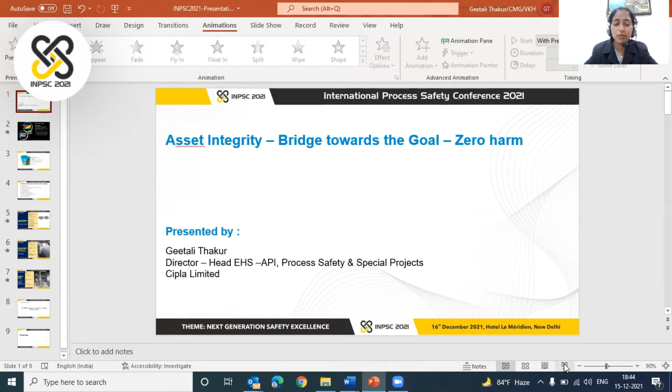Right. So we are going to look at how asset integrity is a bridge towards goal zero. We all have a goal to have zero harm. In the industry, for all the EHS professionals, that's really at the top of the list. And asset integrity really helps to bring what is written in the documents and on paper to achieve this zero harm goal. So before we go ahead, two disclaimers, I should say.

One is that I'm not somebody who designs asset integrity and would actually be implementing it in terms of the mechanical design part of it. I'm more of a process safety professional who is very passionate about what we really give to the shop floor. So that's the first disclaimer.

The second disclaimer, and please excuse me if at all I end up in that mode, is I'm sometimes a teacher rather than a speaker, so hopefully I wouldn't be in that mode today in the next few minutes.

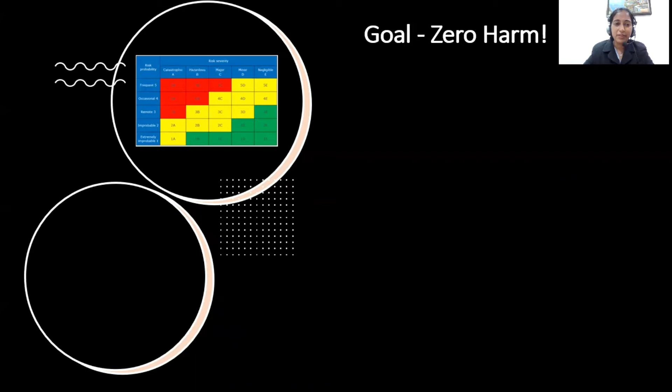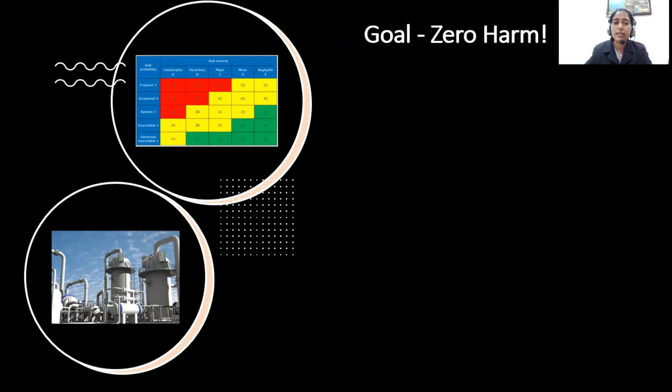Right. So as we go ahead with this goal of zero harm, what we really look at as process safety professionals is we would put things from a hazard document into a risk matrix, and then we would say this is an unacceptable risk, and this is where we can bring in certain controls. But what can really take us to where zero harm can be achieved is working a lot on asset integrity, on what is really required to be safe by design.

What I mean by that is a lot of times when we do these risk assessments, we assume certain things, right? For example, we assume that the nuts and bolts of a particular pipeline will be placed in the right position. Asset integrity, just looking at the definition, is to ensure that the important equipment will be suitable for its intended application throughout its life cycle, whether the plant has been operated for 20 years, 30 years, or however many decades, and to ensure that we prevent catastrophic failures during operations.

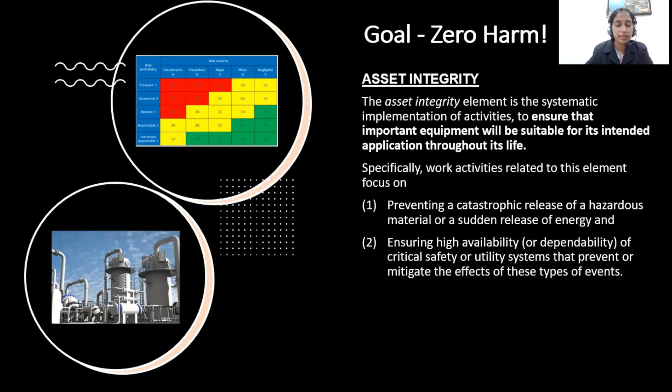So that's really going to be our focus today when we talk about different case studies. I'm not just going to take you through a talk, but through a few case studies.

So again, coming back to this, how do we look at this? If you look at the design, in fact, our good process engineers, the process chemist, and then R&D would give us a certain kind of design integrity, right? And we try to really make a particular process safe by design. And then the operational integrity, that's nothing but process safety management, looks at what are the possible accidents.

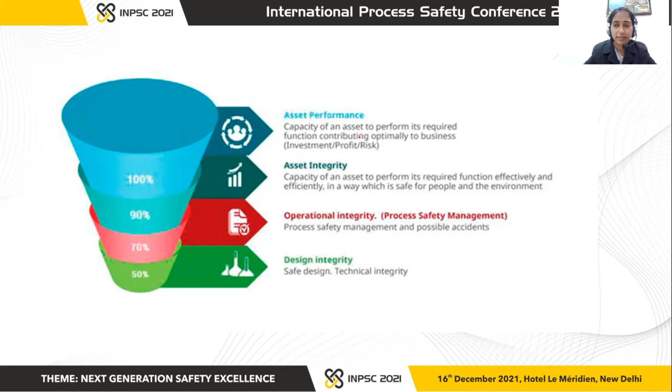So if you see here, we have come up with some kind of a document. And now what's really important is to see how these things which are written in the document can really be brought into reality, to ensure that the asset performs well. And beyond that, to ensure that the asset that has been installed takes care of safer operations, that's minimum risk, and also ensures that overall equipment efficiency is as required or at its highest.

We would really get into each element of asset integrity. I'm not going to bore you by giving you a lecture on all this. But we'll pick up some elements out of this and look at certain case studies on how these particular elements can actually have an impact on safe operations. We'll take some examples out of this.

So the elements are right from risk assessment onwards. The first part, the first 1, 2, 3, 4, is really about how we get certain things installed right, and then how we maintain them right, and then how we really have that PDCA cycle of auditing and surveillance to ensure that things are the way they are designed to be and the way they are desired to be.

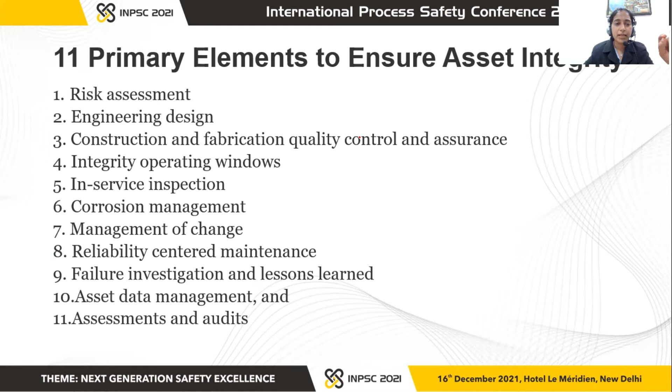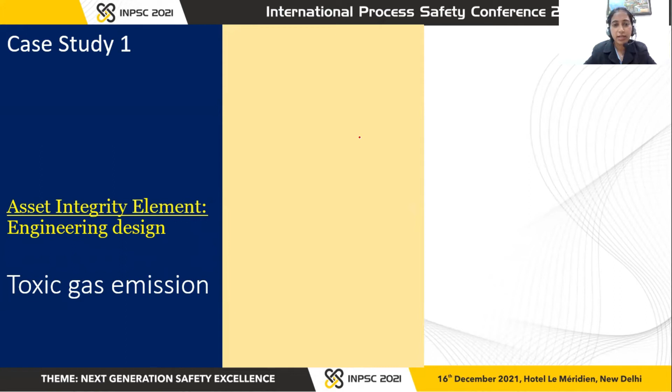Okay. So let's move to our first case study. I don't know if it's a good one to start with, but we are talking about toxic gas emissions, right? And the element that we have picked up is engineering design. We'll look at how asset integrity helps in this particular case. And let me put up another disclaimer here: these are not incidents from any of the organizations that I've worked with, but surely something which is part and parcel of the chemical industry.

So the first case is of a particular reaction which has the potential to form HCN gas as a byproduct. We all know that hydrogen cyanide is lethal. What is less known is that it also has a flash point as low as minus 17.8 degrees centigrade. So it's lethal as well as flammable. What is really required in this case by engineering design is we could have nitrogen pressure padding here. We could ensure that the right scrubber design is put into place.

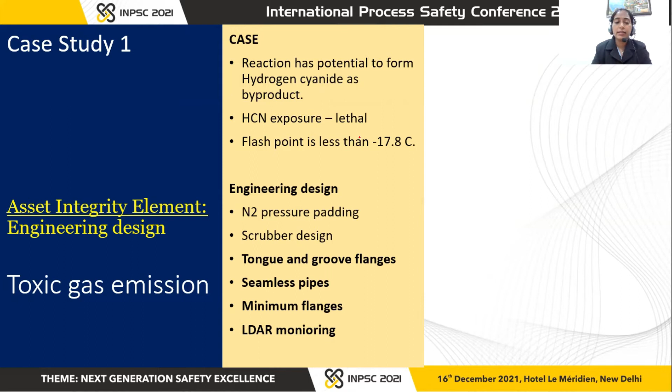The first two would get covered in process safety risk assessment studies, the operational integrity part that we mentioned. But something that is really part of asset integrity is things like tongue and groove flanges. The engineer is going to be the one who would say that for this kind of duty we would have specific types of flanges and pipes. What else could we be doing? Could we have minimum flanges, because those are the places from where emissions could come out, and also have leak detection and repair monitoring in place.

So this is how, in fact, the asset integrity program could be really helping us in this particular case. The next one is a more interesting one. Let me promise you that we do have two more cases which are interesting.

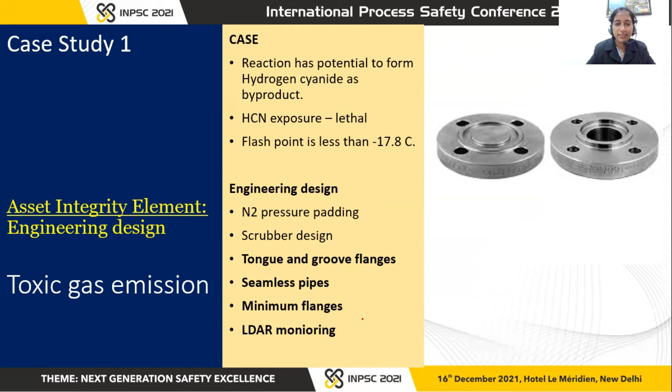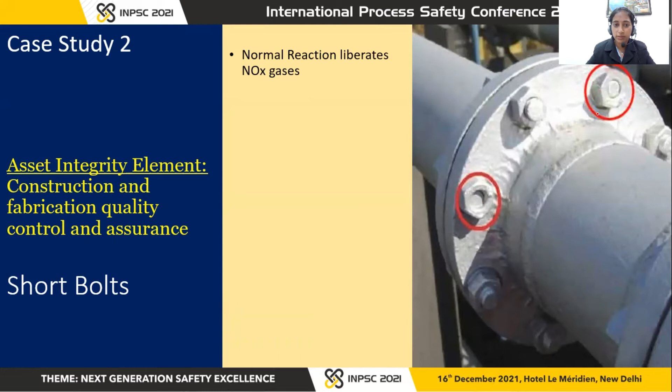So in this particular case, the normal reaction liberates NOx gases. We do have such kinds of reactions in the chemical industry. The safety relief valve is designed for 2 kg per centimeter square. But the vapor column, which takes these NOx gases to a particular scrubber, is having short bolts. So you can imagine what can happen, right?

And in this case, let's say that there is a scenario of vent blockage. So in that case, what's going to happen? What could happen is that it would start pressurizing, and this could end up as a weak joint, leading to spraying of liquid from these flange joints, causing injury, disability, whatever we say.

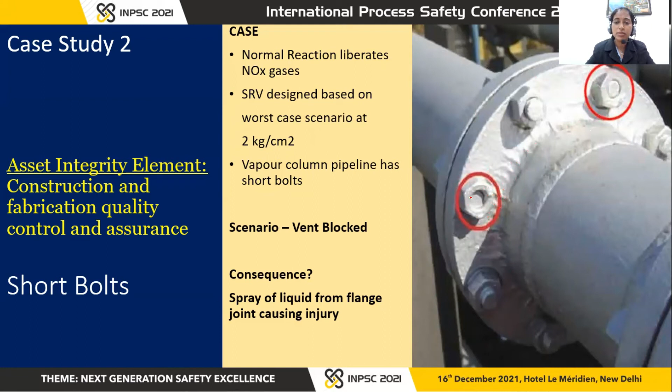So just this particular small job, these sometimes are in the hands of the contract employees who are carrying out this particular job. Imagine the consequence of this, and just a small thing of how asset integrity really plays a role. The third one is on corrosion register maintenance.

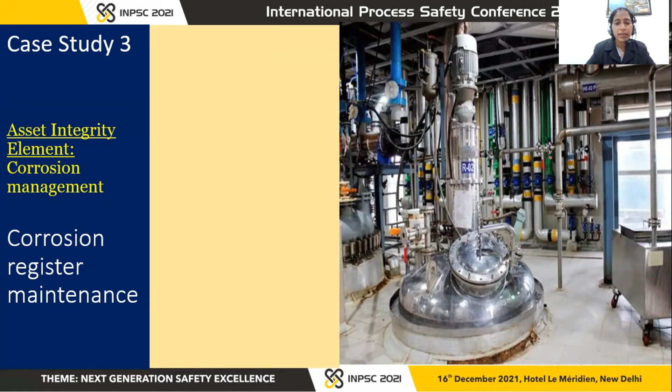So corrosion maintenance is the third element that we have picked up here. Because this is a corrosive chemical or reaction mass, a Hastelloy reactor is used for reaction, followed by distillation. So let's take a case where the annual or regular maintenance is not done, or it is rescheduled, or because of production pressure, production has been running for more months.

And the hazard here is that the onset of decomposition of the distilled residue lowers if there is presence of iron. So if there is any amount of iron there, this is what can happen. If there is some pitting corrosion set in on this material of construction, this could lower the onset of decomposition, which means that the reaction mass residue at the end of the distillation could get into decomposition mode at earlier temperatures than it was supposed to.

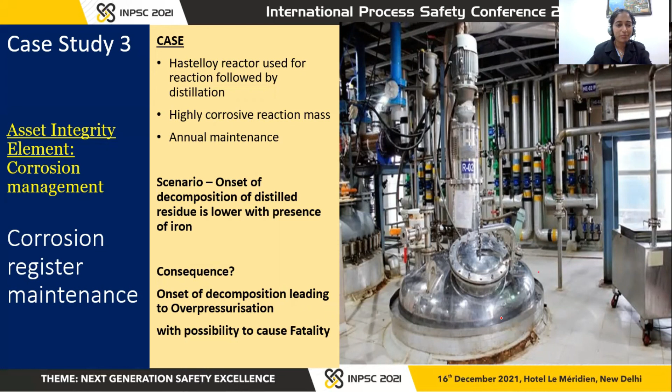And that can lead to overpressurization of this particular reactor, causing fatality, injury, whatever we would say. So I was just trying to link how important asset integrity is, right from the design stage till the maintenance stage: design, fabrication, and then maintenance. In the given amount of time, I thought these were three easier studies to put across to the delegates at this particular conference.

So just a closing remark I want to make: PHAs, risk assessments, whatever we call them, in whatever tool we do them, are incomplete without a complete asset integrity program. And that's actually the reason why we require a good, strong asset integrity program.